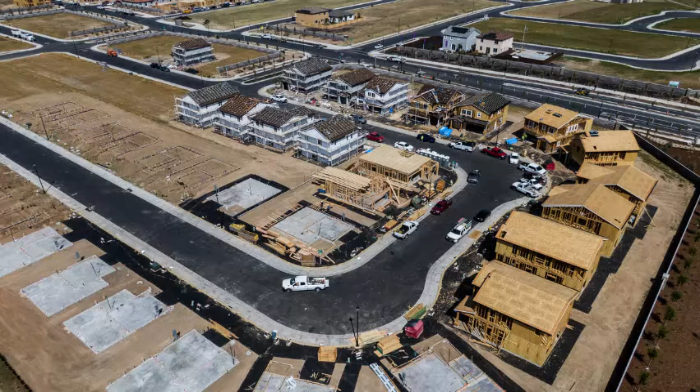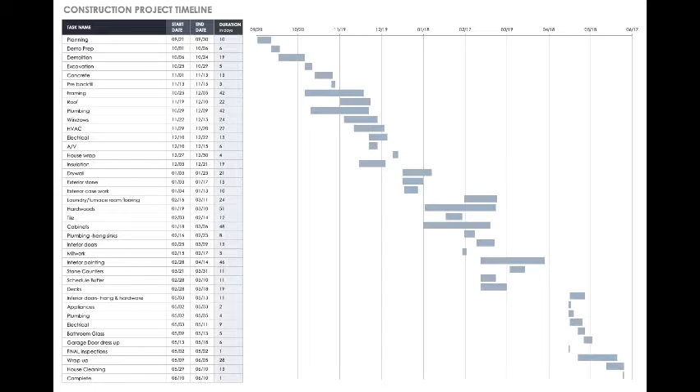Not to mention the headache that is communicating between the field and the office. All of this leads to prolonged deadlines and increasing the cost of construction, which in turn makes the ability to create enough homes for our growing population that much more difficult. In the coming months, I am going to enter this housing market, and I dread it. I want to give my daughter a backyard and a treehouse like I had when I grew up, but with our current circumstances, I don't know if I will be able to.

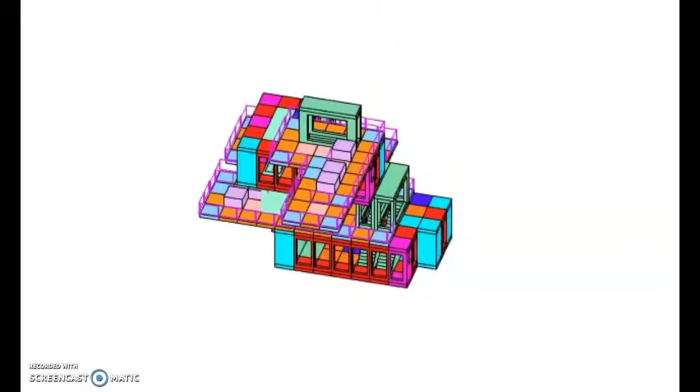Because of this, my thesis has sought to reimagine architecture and re-envision the role of the architect. The root of the word architect is the Greek architekton, or master builder. For most of our history, we worked in the field alongside master craftsmen to create our vision. This romantic practice is now rarely an exception and is primarily reserved for the wealthiest among us. The digital revolution has the ability to restore this master builder role and bring architecture to the masses.

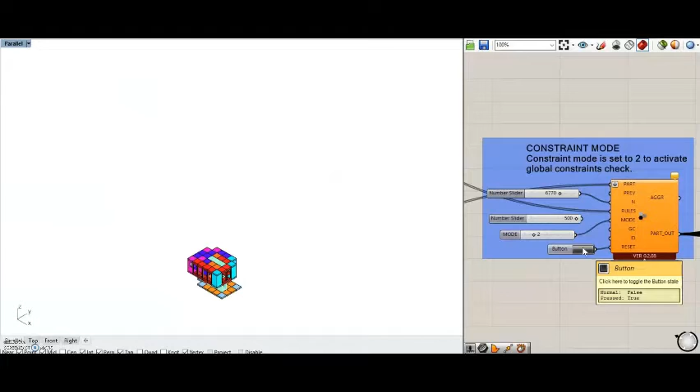I propose that all architecture should be pre-designed modular assemblies that users can digitally assemble and customize themselves. Architects would be tasked with creating modules that snap together to create mass customizable homes. These modules could then be uploaded to an online archive where users could pick and choose what pieces they want to assemble, customize, and choose their finish. Metrics like cost, carbon usage, real-time renderings, and VR walkthroughs could all be calculated in real time to help inform the user.

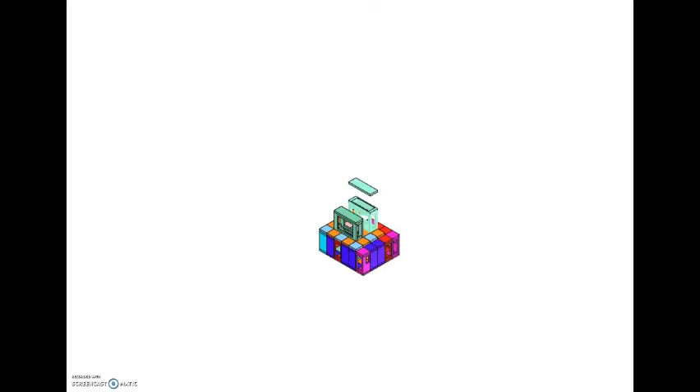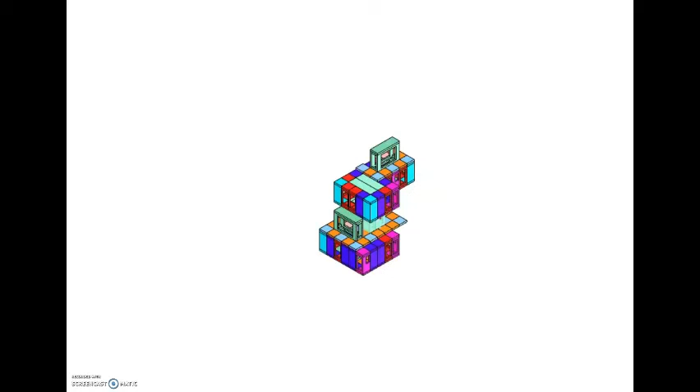Once completed, the plans are sent to a manufacturer where the modules are created in-house and shipped to site. This process brings us closer to the success of the Sears housing catalog by providing the user an intimate and autonomous role and distances us from modernism's failed one-size-fits-all prefabricated universal homes. I envision this as a way to dismantle the barrier between client and architect, and as a way to provide high design to people that would normally not be able to afford an architect.